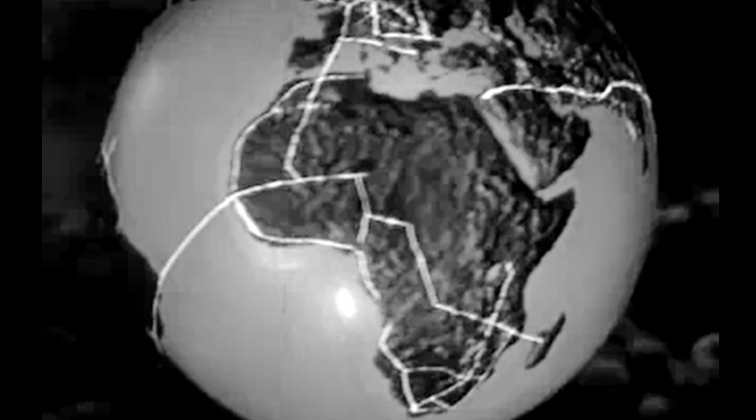Worldwide coverage, but it has not been accomplished in a day. It is the result of a smooth-running combination of men and machines. In that combination lies the story of Lockheed itself. It is a success story, modern, exciting, typically American.

The Lockheed Aircraft Corporation plant, Burbank, California, in 1926. And today, the same company, the same location, but quite definitely not the same plant. As recently as 1932, sales aggregated the overwhelming total of $23,298.03. In 1940, actual deliveries amounted to more than $42 million. And conservative estimates indicate that in 1941, this figure will be more than doubled.

To the men of Lockheed belongs a large share of the credit, to their skill and to their loyalty. They are a cross-section of typical American workmen: drillers, riveters, tool makers, die casters, machinists, and technicians. In 1931, there were only 300 of them. In 1941, over 35,000. Every man who checks in, from office boy on up, has taken and passed exhaustive tests covering intelligence, temperament, and special aptitude to prove his individual ability. 35,000 American workmen, the right men for the right jobs to build the best planes.

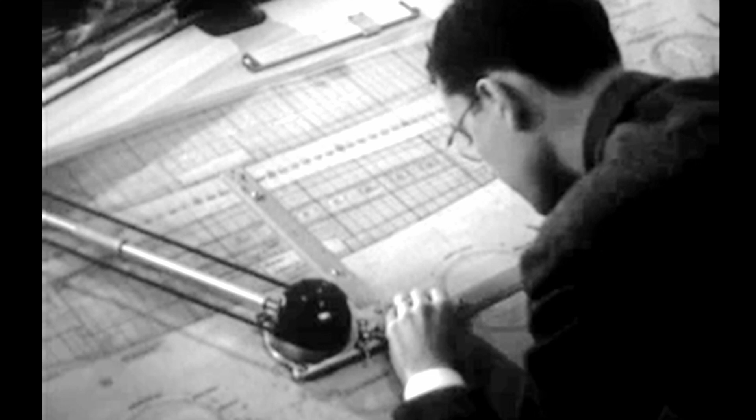This is not a trick shot made with mirrors. It is the drafting room of the engineering department where every new Lockheed has its beginning, conceived with the purpose of supplying the answer to definite needs of the aviation industry. To attain this goal, over 850 engineers make over 5,000 drawing plans, devoting a total of over 200,000 work hours to their mission of creating one new design. The component parts of a modern airplane's wing, fuselage, and tail surface are almost countless in number, yet every single one of them must be engineered.

Even the most minute part receives the greatest attention. Four separate drawings are made showing detail from four different angles. Although the part is no larger than a silver dollar, it will have to go a great deal further.

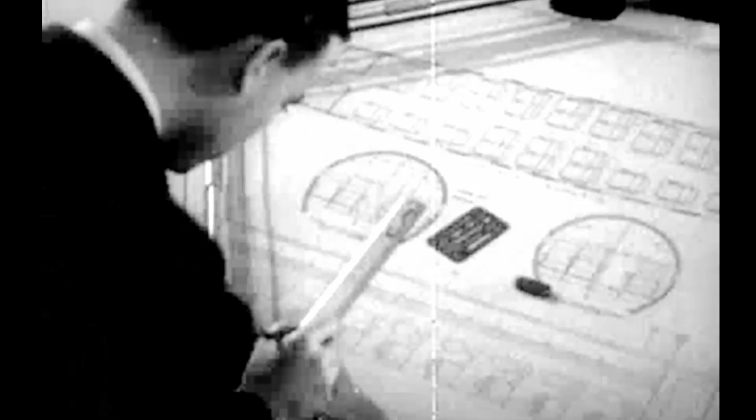The interior of a plane is one feature of design seldom associated in one's mind as coming under the supervision of the engineer. Yet one of his most important jobs is to provide utter comfort for passengers traveling through the air at high speeds. The Lodestar's cabin has been designed for this comfort. Inside, the sound of powerful motors is reduced to a pleasant hum by scientific soundproofing and vibration control. Restful chairs, ample space, and headroom are results of thoughtful planning, and all Lockheeds are especially adaptable to the requirements of private owners. For businessmen to whom time means money, the Lodestar is convertible into a convenient and dependable office in the sky. The compact 12 becomes a comfortable lounge for attending important events anywhere at any time.

The cabin of Lockheed's new four-motor transport, the Excalibur, will look very much like this. Although the plane is still under construction, the engineers have built an exact replica, known as a mock-up, out of wood. In this way, every possible detail of passenger comfort can be effectively predetermined and applied.

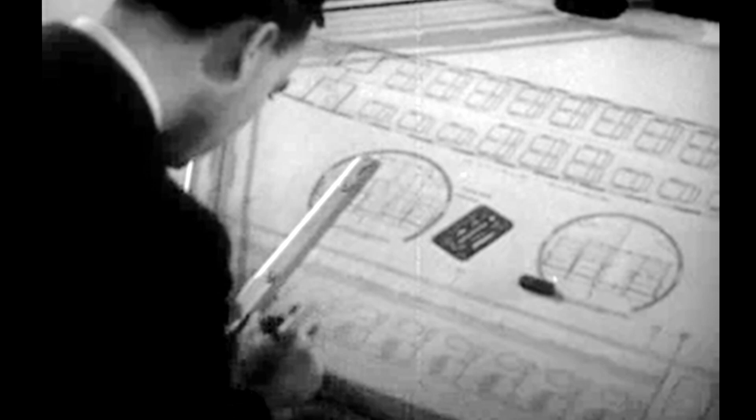But the ideas and plans that this man and the hundreds like him put into execution are not only those of Lockheed's chief engineers, but those of the entire flying world. For the Market Research Division maintains close contact with the operative branch of the industry. The staff compiles lists of important features relating to a plane's design. These findings are set up in the form of questionnaires.

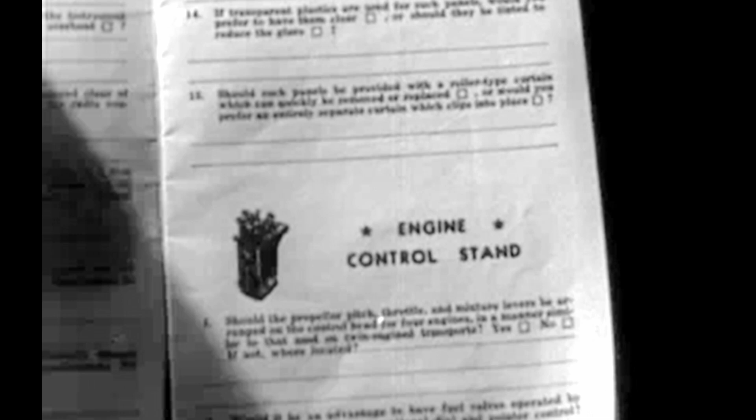If you were to build your own ship, on the flight station, where would you locate emergency controls? On the engine control stand, where would you put the levers and the rudder pedals? These comprehensive questionnaires are sent to airline executives, pilots, transport officials in every corner of the world: to Trans-Canada Airlines, R.C. McLeod in South Africa, Tri-American Aviation, Buenos Aires. The list is almost endless, but to mention a few more: American Airlines, Lieutenant Thatch, VP-5 Squadron Canal Zone, and British Airways.

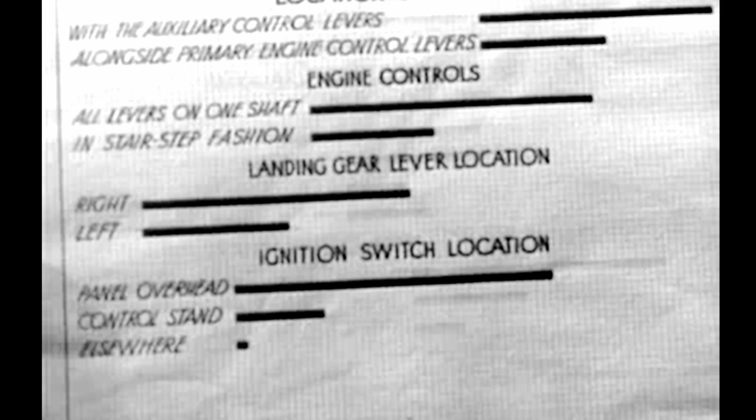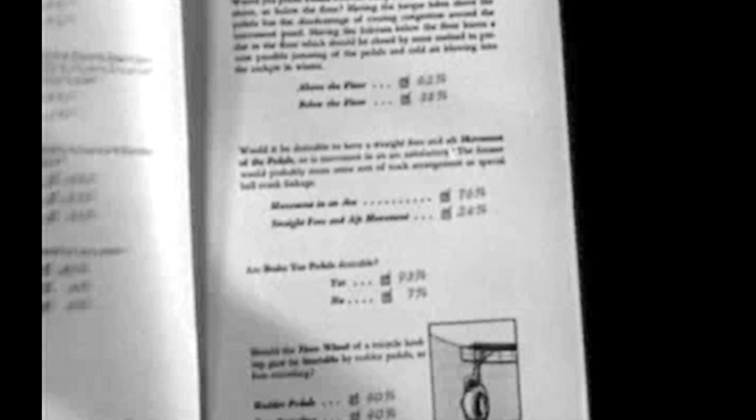The replies to these pamphlets are carefully sorted, for they represent knowledge gained under actual flight conditions. Detailed graphs and charts are compiled by competent statisticians. No suggestion is too small. Every answer to every question is checked and noted. These findings are recorded in another pamphlet: you told us this is the way you would do it, on flight station, on engine control stand, and on rudder pedals. We asked, are brake toe pedals desirable? 93% said yes, 7% no. That verdict is submitted by men whose combined opinions represent the experience of over 16 million hours of flying.

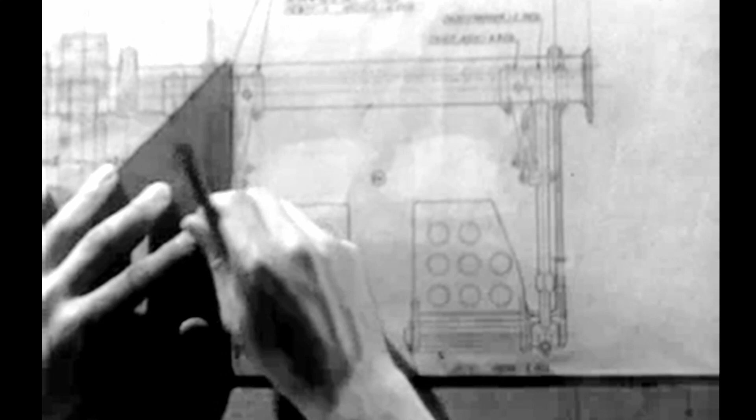These practical viewpoints, as gathered by market research, are submitted to the engineers. They combine these ideas together with their own creative ability in the conception and building of every new Lockheed plane. That's how Lockheed designs airplanes to suit the men who know airplanes best: operators, pilots, and regular airline passengers. And the first form a new plane takes is on paper.

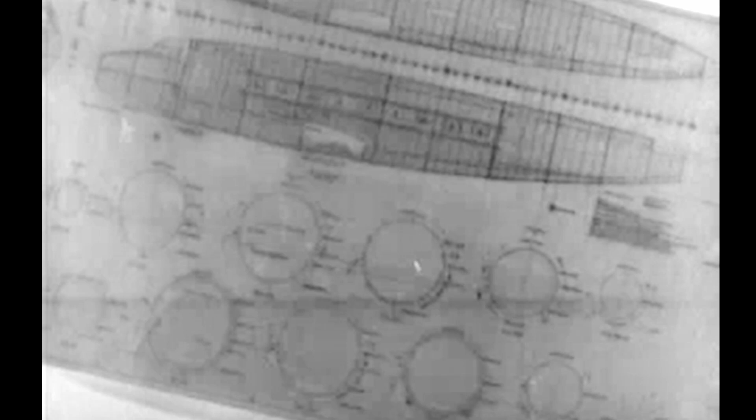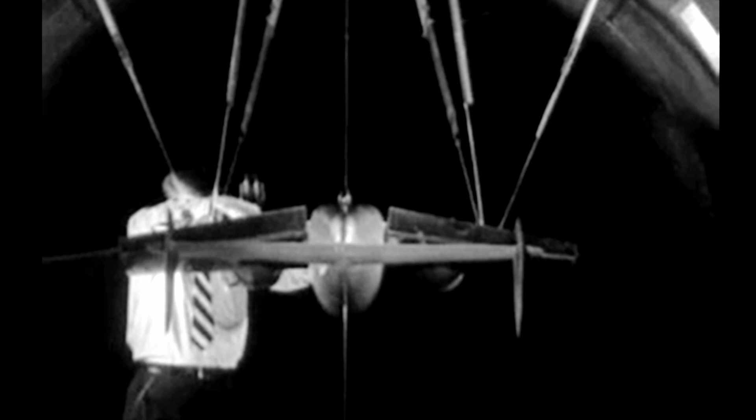From these drawings and thousands like them, an exact scale model known as a wind tunnel model is made and is connected to instruments which determine its flight characteristics. The model is hand-carved, accurate to the fraction of an inch, weighs over 500 pounds, and costs more than $5,000 to build.

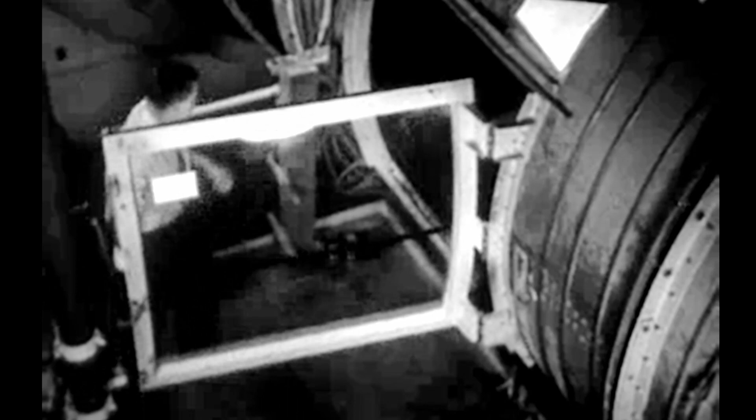The door is closed, the wind tunnel sealed. A flip of the switch and the wind propeller whips up to speed. The model is exposed to a far higher velocity than this 90-mile-an-hour wind.

The small wind tunnel model is actually subjected to and withstands a much greater force. From an idea to an actuality, from theory to fact, from a model to a completed Lockheed, the plane has been built. More than that, into it has been built the strength, ruggedness, and durability necessary for its safety and high-speed performance. But not so long ago, this shining plane was only a small part of a trainload of metal addressed to Lockheed.

For the metal inside these wooden frames is the stuff that planes are made of. Hard and strong, it must be fabricated by men and machines into the parts that make airliners.

Giant shears act as huge mechanical scissors. Metal sheets are slipped into place. The sharp blade strikes and cuts through them as if they were cloth.

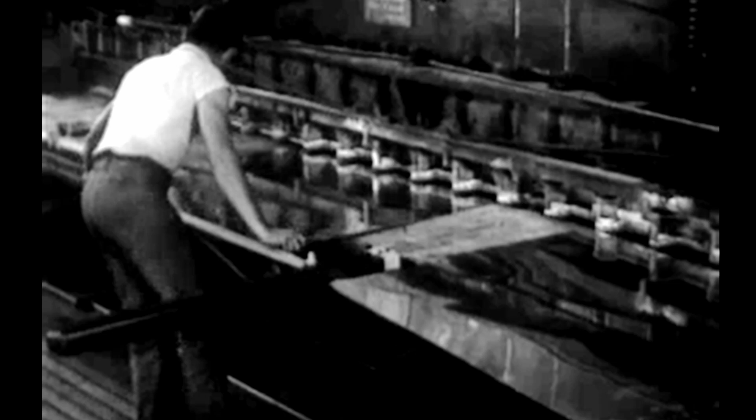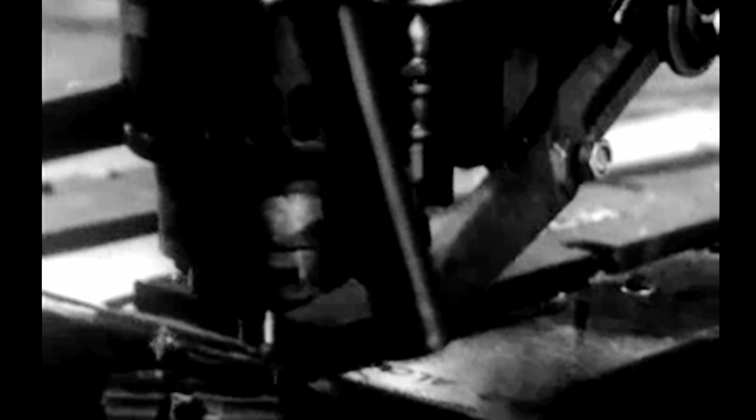The high-frequency router, a dental patient's nightmare, turns 15,000 revolutions a minute and cuts layers of metal into their first rough shape. The bit turns so fast that it must be cooled by a constant stream of oil.

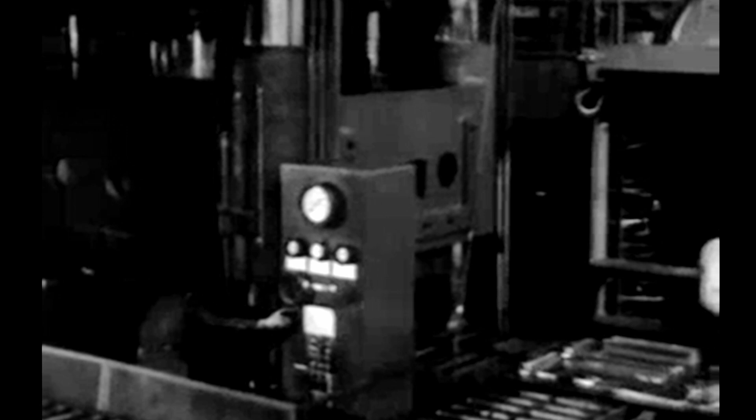The massive hydro press exerts an overall pressure of 9 million pounds, and it literally squeezes parts out of metal. An endless chain of roller conveyors carries a tray with the forms to workmen. They put the metal, which has already been cut to the correct size, in place on the forms. The tray now continues on its way into position under the press.

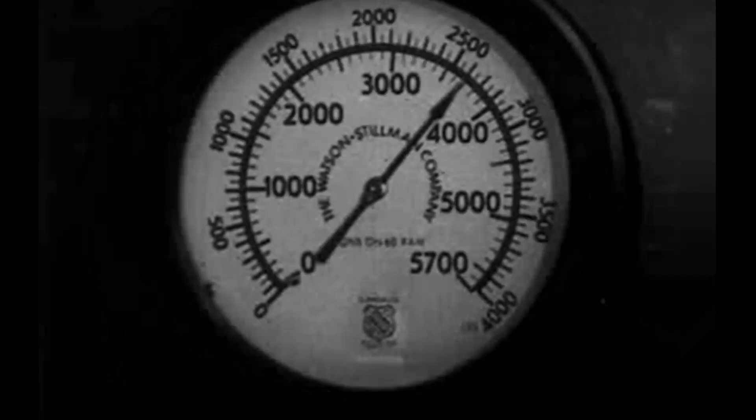The operator touches a switch, the press starts down, and look out below. Almost unbelievable pressure, an irresistible force, but under perfect control. Where plain sheet metal went in, finished parts come out. The hydro press turns out more parts in 1 minute than 2 men could complete in a whole day, and turns them out better and more accurately.

A compressed air stamp which forges metal is an excellent example of powerful machinery under absolute control. Taps as gentle as a tack hammer, then the crushing impact. What a nutcracker this outfit would make. And yet its control is so delicate that it can crack an egg, at least so the operator claims.

Look out there. A little too hard and you'll have an awful mess. Be careful.

Well, hello, stranger. You certainly have a brand new kind of a mama.

Skilled men and precision machines have fabricated these parts. But even metal can be strengthened and protected. To do this, there are several types of processing. Complete electrochemical anodizing baths provide parts with a protective coating of oxide film.

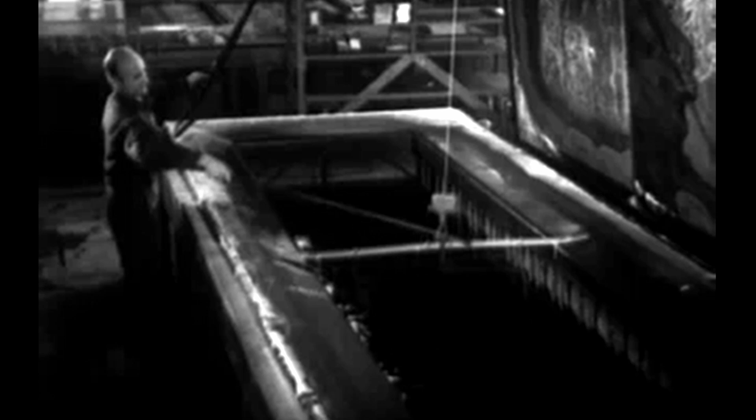This is a safeguard against the threat of corrosion caused by moisture. It is an interesting fact that these parts are protected against any harmful effects of moisture by being given a bath. Another type of bath is used for a different purpose. In order to harden and thereby strengthen certain parts, they are immersed in a hot salt solution of sodium potassium nitrate.

In large ovens, other parts are hardened by baking at 1550 degrees Fahrenheit and quenching them in oil.

It is easy enough to say that these parts, which will eventually be the plane, are strong. To prove that they are, to constantly guard the Lockheed measure of strength is the duty of the testing laboratory.

A spectrograph is one of the most modern scientific testing devices. It analyzes the purity of the metal alloys which go into a plane.

Tremendous heat created by an arc burns sample filings of the metal. These filings are placed in a cavity on the lower of two acid-treated graphite electrodes and then burned. The light of the burning metal passes through a lens and then through a rotating sector, the adjustable opening of which controls the amount of light falling on the slit.

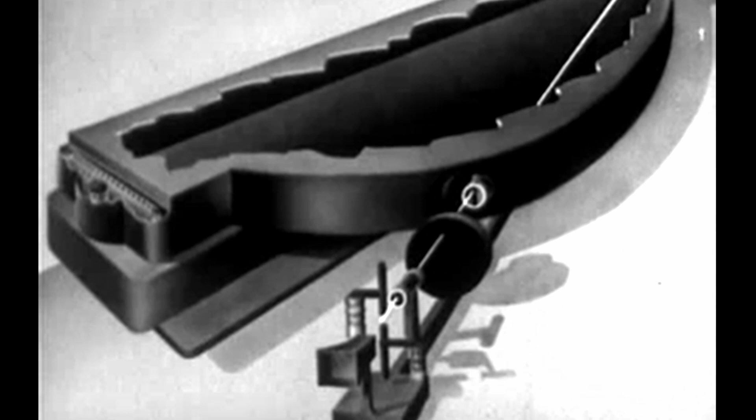The light now passes through the slit and falls upon a diffraction grating. This diffraction grating is a concave aluminized glass plate on which 24,000 lines per inch have been ruled with a diamond point. The light is separated by the grating into wavelengths.

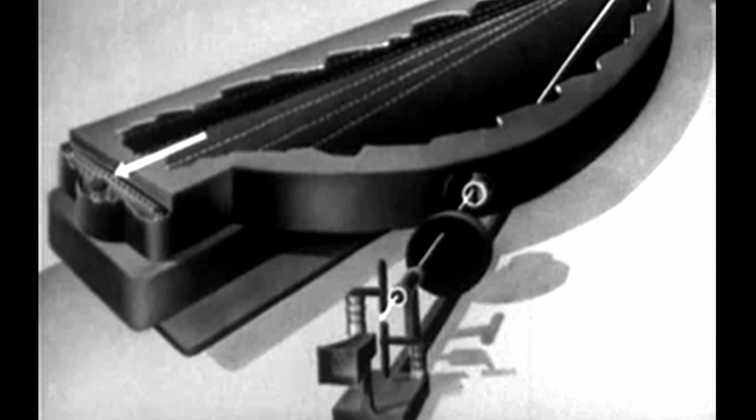These wavelengths, or light rays, fall upon a strip of film, and a photographic record of them is thus produced. Since each element has its own wavelength, from the developed film it is possible to determine exactly which are present in the alloy. In this manner, the spectrograph immediately detects all impurities, and any inferior metal is promptly discarded.

The sole purpose of this huge machine is to break things. Its powerful jaws, capable of a compression of 300,000 pounds, are about to crush a small section of the wing in order to measure its resistance. Now watch carefully. The upper jaw is clamping down with an invisible, relentless force on the seemingly frail strip of metal. But actually, just how frail is it?

60,000 pounds? 70,000? There it is, a slight ripple. The breaking point has been reached, and it takes a pressure of over 80,000 pounds to even bend this frail little section of a wing.

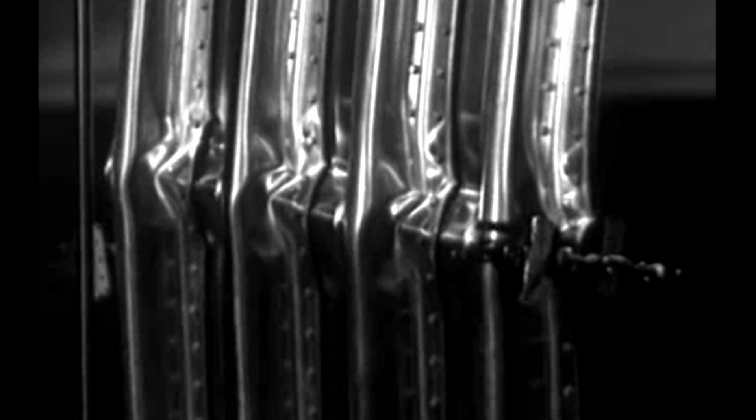For contrast, let's see what happens to a solid cylinder of concrete, which certainly appears much stronger. There is the first crack, and the concrete shatters completely under a pressure of less than 75,000 pounds.

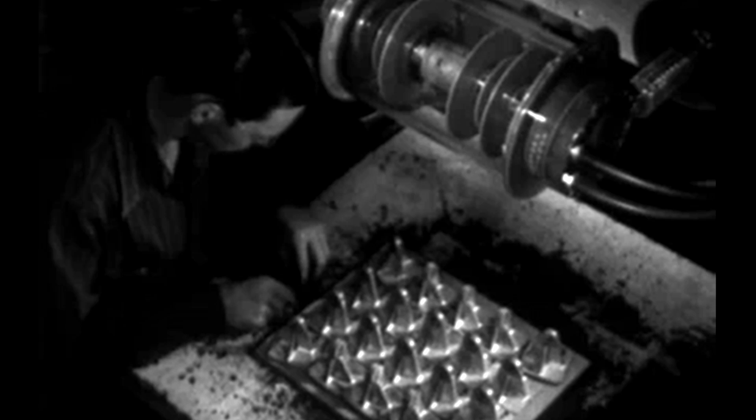All stressed parts, such as forgings and castings, are X-rayed for any possible flaws in the metal. Lockheed X-rays more parts than all other aircraft manufacturers combined. They may look new and shiny on the surface, but that doesn't matter. What are they like underneath? This batch is fine, perfect. A different story here. Those slight, almost imperceptible flaws which doom it to the scrap heap would be invisible to any eye other than the X-ray. Therefore, although it is important to know what is on the outside of a plane, every stressed part is X-rayed because Lockheed thinks it is even more important to be absolutely positive of what is on the inside.

Yes, every part of this plane is built for the strength, ruggedness, and durability to achieve the highest speeds. And there goes the Lodestar. Carrying a full load of 17,500 pounds, it speeds down the runway for takeoff. In 15 seconds, after a run of only 860 feet, it leaves the ground and soars into the air, climbing at a rate of 1,200 feet per minute.

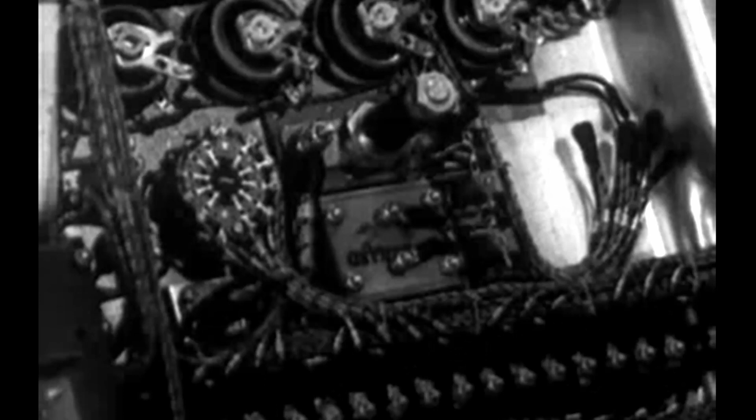And while the plane is in flight, the dials and indicators on the panel are the guides by which a pilot flies. Over a half a mile of wire connects them with the controlling instruments, which must be infinitely accurate before they are installed. In the instrument testing laboratory, each instrument and accessory is, to all intents and purposes, actually flown before being installed on the plane itself.

For instance, on this stand, a motor duplicates the swing of a plane to test the turn and bank indicators. Here, tachometers are also tested, and propeller governors, vacuum pumps, fuel pumps, starters, generators, and hydromatic motors for feathering propellers. The automatic pilot is checked by a vacuum system against mercury manometers. This small box can guide a plane in flight, keep it as true to its course as the most experienced pilot.

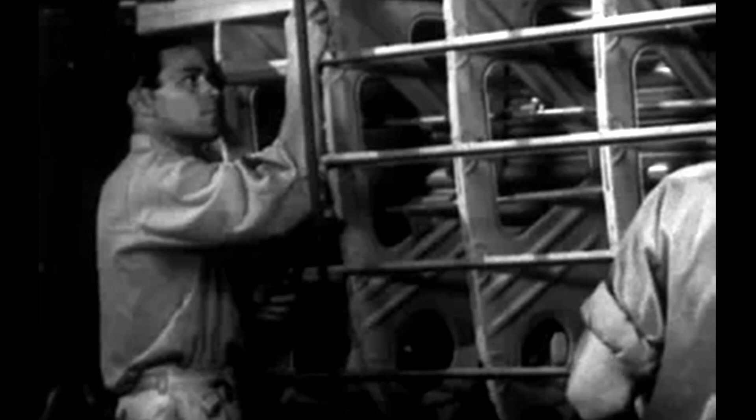An airplane is a chain of which the thousands of separate parts are the links. They must be forged together in order to shape the wing, the tail, and the fuselage. The duty of the wing is to provide the lift that sustains the flight of an airplane. Here in the plant, it must be assembled as flawlessly as it was designed. Although a wing is generally considered as a unit, it is really composed of 3 parts: 2 outer sections and the center section. We are all familiar with the general shape of a wing, but while an outer section is in the first stages of assembly, we can get a good idea of the complex structure on the inside.

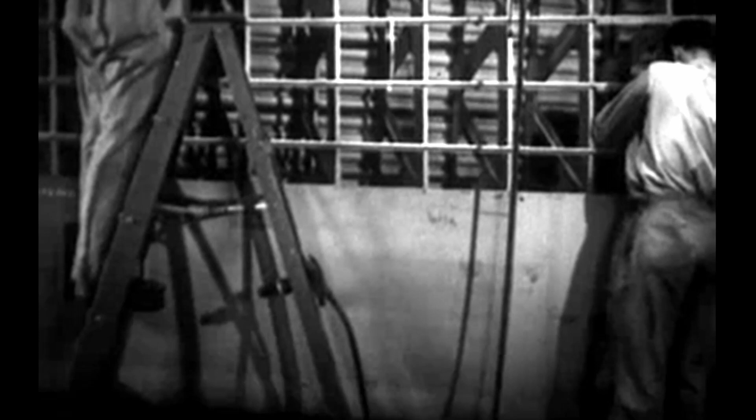Every rib and crosspiece has its purpose. Remember, it was just a small part of the wing that we saw withstand a compression of 80,000 pounds. Each operation is executed with precision and care as the outer section moves down the production line and takes shape.

High-speed electric drills punch holes for the rivets. There are more than 700 drillers or riveters who have all had previous training. Even so, before they're assigned to actual production, they must attend Lockheed's own school until they can uphold the plant's standard of efficiency and skill.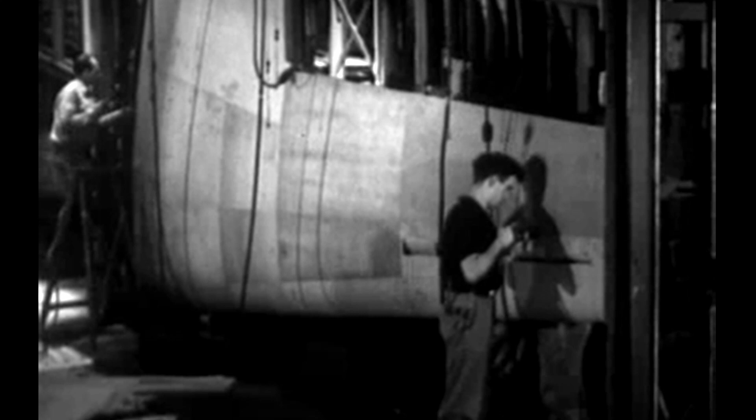There are more than 50,000 rivets on a completed wing, and every one of them is checked, examined, and checked again. This requires an army of over 200 inspectors, such as this one. But by the time a Lockheed plane is assembled, every square inch of it has been inspected at least 5 times. Inspector number 158 finds this row perfect and okays it.

And the story of one outer wing section is the story of 10, of 20, of 1,000 sections as they move down the line in an endless parade. Mass production with the emphasis on precision and quality.

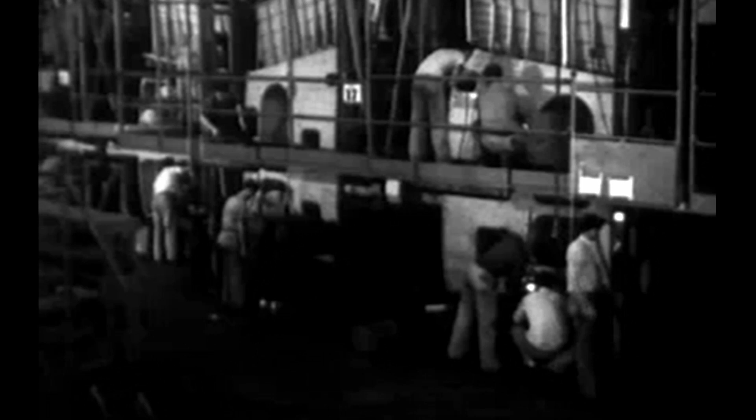The assembly line for the center section of the wing is one of the largest and most vital units in the plant. It has to be, because the center section is the strong man of the plane. It must be constructed and assembled so as to be able to support heavy loads and to withstand great strain, for it unites the 2 outer wings with the fuselage. The fuselage will eventually rest in the gap between the 2 shoulders, and the wings will be joined like arms on either side. The main beam of the center section is the strongest part, the backbone of the entire plane.

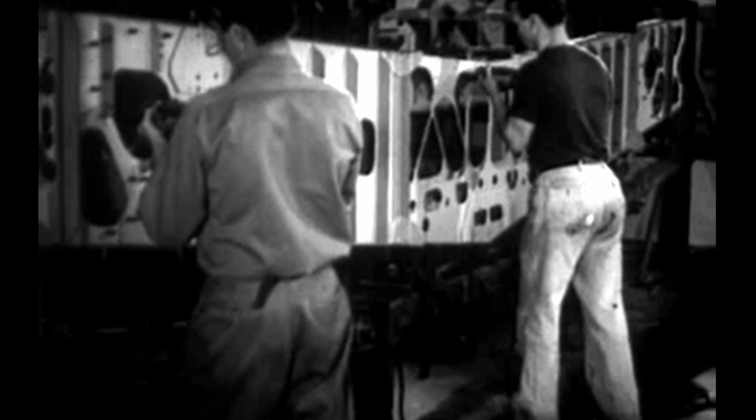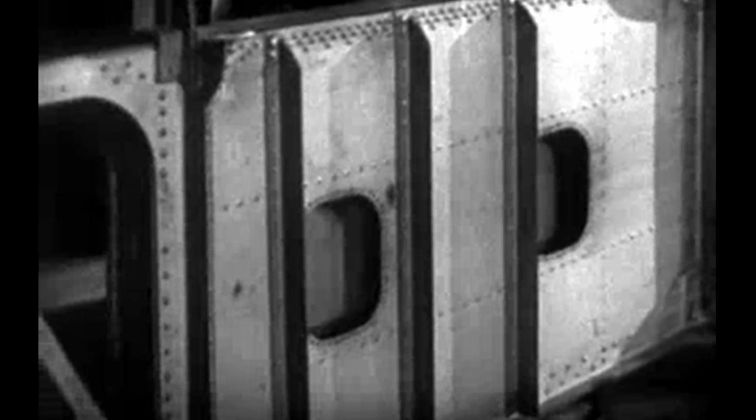Like a bridge, it must carry any burden with steadfast dependability. And the main beam is built just like a bridge. At all times, it carries all of the flying load, the engine load, and the landing load. And it is stressed to support more than 5 times the total weight of the fully loaded plane. Completed and assembled, capable of supporting a static load of 70,000 pounds, the wing will do its job as the men who built it have done theirs.

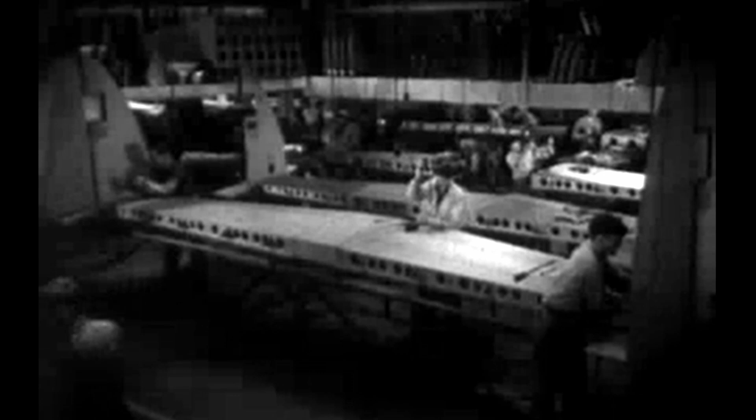The tail surfaces control the maneuverability of a plane. The use of twin rudders was developed by Lockheed and are one of the distinguishing features which point out every Lockheed. The fuselage is the body of the plane.

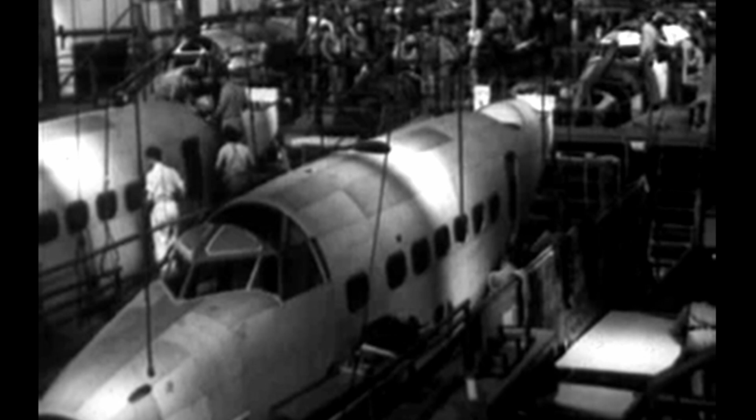It represents the final word in aerodynamic design and streamlining. And during construction, these basic principles are built into the fuselage and applied to every operation from the beginning to the completed shell.

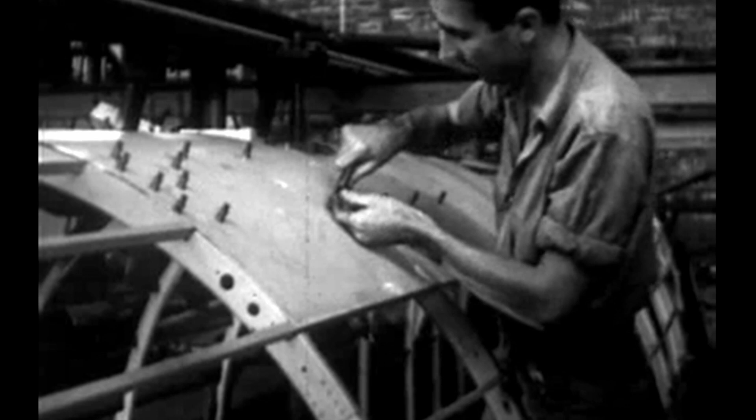As the first step in its assembly, the bulkheads are joined together by stringers, which form the basic shape and strength of the fuselage. Skin fitters then fit and shape the metal sheets, attaching them with removable fasteners. On their heels come the riveters, while every stage of the assembly is constantly under the close check of inspectors.

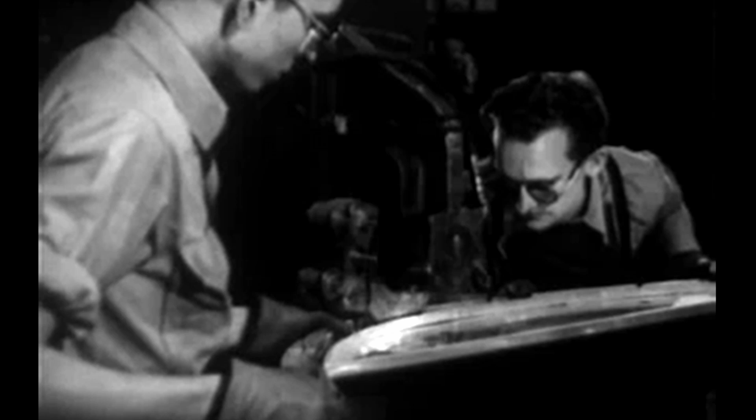Assembling with electric continuous spot welders facilitates production and gives many fuselage parts an extra smoothness for better streamlining. With an eye to the future, Lockheed is constantly enlarging on this process because better streamlining means greater speed.

And so another fuselage is finished and ready for mating with the wing. Like a ship being launched, it moves slowly down the ways. Slowly now, yes, but for just a little while longer.

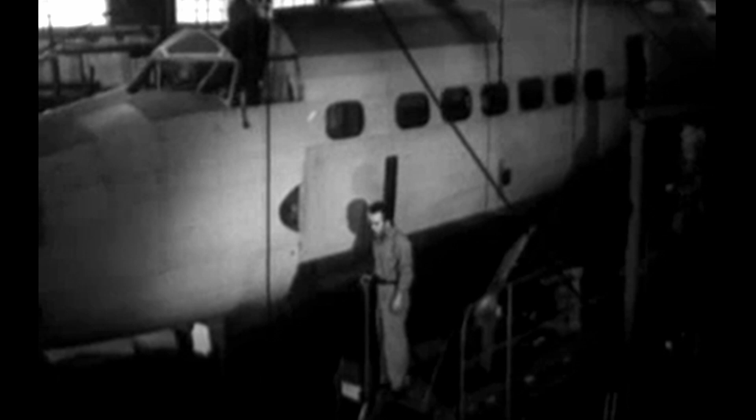Soon sunlight will be glinting from its metal sides. Its nose will point upwind. In the comfort of its cabin, passengers will read or write or sleep or think after their own fashion, and beneath it, the lakes, rivers, and valleys of the countryside will unfold.

Slowly still, the fuselage is lowered into place, united with the wing, and now, slow no longer. Speed on the water. Speed on the snow. Speed on wheels. On rails. Speed on wings. There is truth in the slogan that it takes a Lockheed to beat a Lockheed.

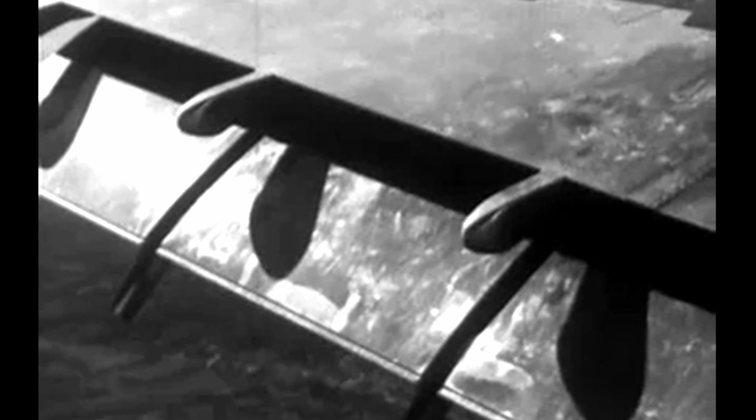And as the plane approaches the field, it slows down for the landing. The Fowler flap has been adopted and developed by Lockheed. The flap gives a greater lift to the wing and provides a brake action to reduce the speed. The plane lands at 65 miles an hour, and from a height of 50 feet, it can come to a complete stop in less than 600 yards.

This Lockheed Lodestar, with its safety, its comfort, and its great speed, typifies the ideals of aviation in America. To protect these ideals, Lockheed is contributing its share toward national defense and the defense of democracy in other parts of the world. These 414 bombers, better known as the Lockheed Hudson bombers, are rolling off the production line at an ever-increasing rate. They have been ordered in great quantities by Great Britain and Australia.

When ready for delivery by boat, the Hudson bombers are dismantled. The sleek fuselages are carefully encased in canvas, and the wings, already stowed away below deck, are crated in wooden frames for safe shipment. When the planes reach their destination, they are easily reassembled and soon ready to take their places in the staunch defense of the British Empire.

And while these planes start on their long journey by water, others are being given their final test flights for the tough job ahead. And still more are winging their way directly toward Canada. In combat, in actual line of duty, the Hudson bombers have won a name for their efficiency and dependability.

And as America builds its planes for commerce and for defense, it is well to remember that Americans invented the airplane and developed the modern conception of mass production used by Lockheed.

And out of the vast production line come Lockheed's, the 212, the Electra, the 12, the Hudson bomber, the Lodestar, and now Lockheed's answer to the challenge of our times, the Interceptor Pursuit P-38. It has been developed solely for national defense, and Army officials consider it the fastest military plane in the world today. The P-38, a man-made comet.

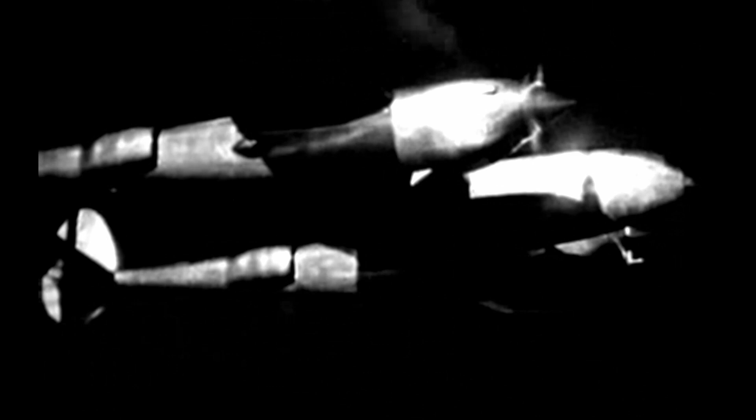The P-38 is a completely new development in conception and design. The purpose of this deadly single-seater fighter is to prevent any would-be attacker from reaching his objective. Lockheed is building vast quantities for the United States Army, and many of its features are closely guarded military secrets. But it can be revealed that the P-38 will climb a mile in a minute, and its motors are so quiet that it can approach any target almost without warning.

And as wings soar higher above America, so are soaring the hopes of free men the world over. For they know that whether it be for commerce or defense, ship for ship, American planes have no equal. And just as Lockheed commercial transports serve the people, so do the Lockheed military planes stand ready to serve should the need arise. The striking power of Hudson bombers, the speed of the P-38.

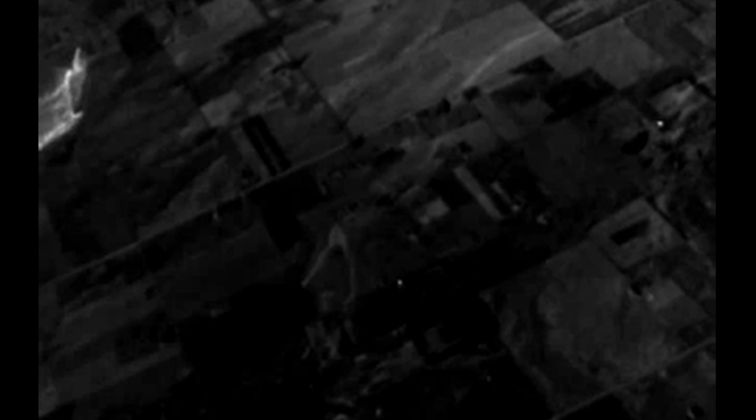Envisioned by Lockheed, engineered by Lockheed, built by Lockheed. Wings of eagles for the protection of our country. Wings of progress for the prosperity of our people, today and tomorrow.

And the airplane of that tomorrow, who knows what it will be, for the march of aviation has been so swift. But whatever it is, the world will look to Lockheed leadership then as it looks to Lockheed for leadership today.